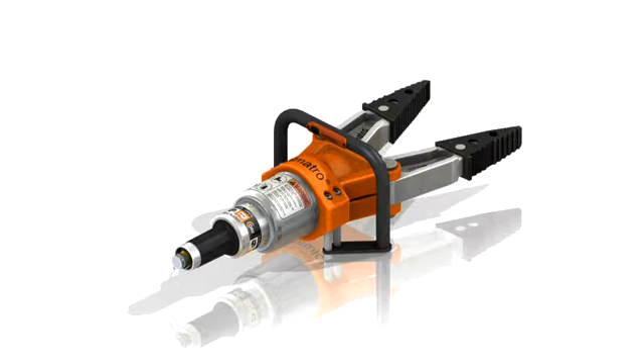This is your first look at SolidWorks simulation. With rescue equipment like this, performance is everything. The product must work reliably every time.

SolidWorks contains a powerful set of tools we can use to test out the performance of a design in many different ways. Two key areas that concern most designers are function and strength. Let's look at how SolidWorks Motion and SolidWorks Simulation tools can help us evaluate these goals.

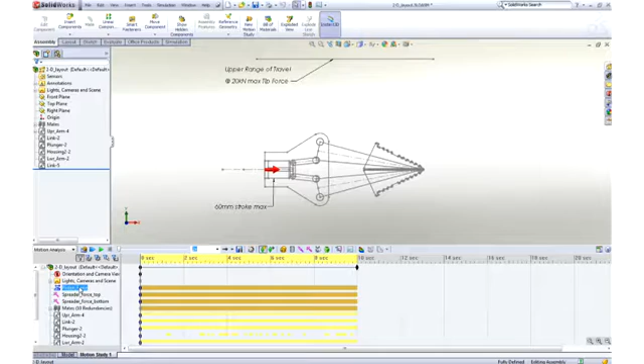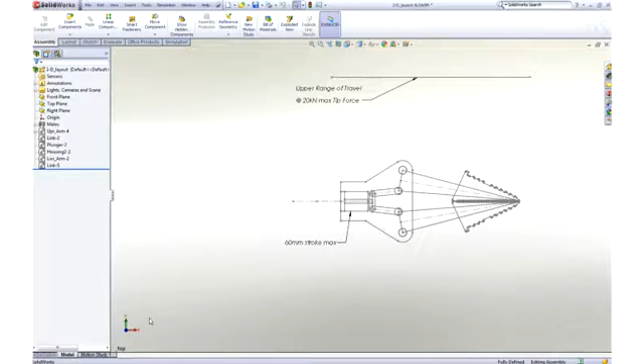We've seen how we can assemble our design in SolidWorks, but how do we know it's going to function correctly? It's invaluable to be able to validate the spreader operation without the need to cut metal or build prototypes, like in the case of this sketch layout concept. With SolidWorks Motion, we can easily test our design during the early stages of development to aid in sizing parts, bearings, motors, and actuators to ensure they meet our design goals. As we go through and refine our design, we can continue to use motion to validate the function.

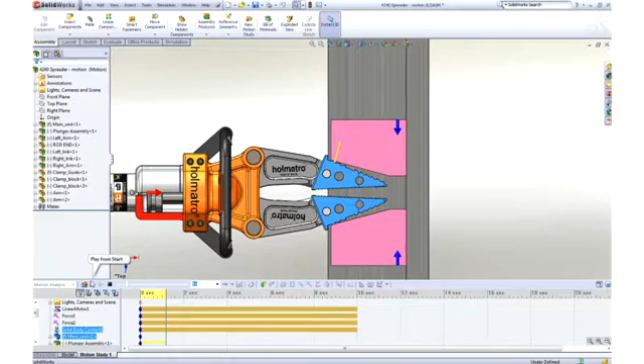Here we have a test fixture to determine the piston force required at different jaw openings to meet a minimum spreader force requirement. In SolidWorks Motion, we need only apply an actuator to drive the piston through its range of movement, the desired spreader force on both blocks, and finally specify that the tips of the jaws and the blocks will contact. An accurate physics engine then calculates the resulting motion, forces, velocities, and accelerations.

We can look at a wealth of engineering data such as the bearing loads on the pins, how quickly parts are traveling, and so on. With the built-in plotting tool, we can quickly show the required piston force with respect to the open position.

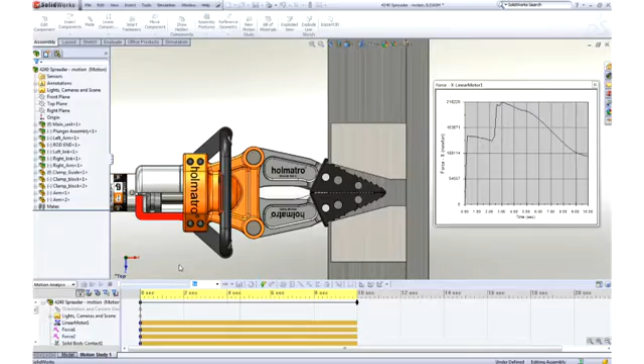We're even able to check the strength of selected parts in the mechanism over the entire range of motion. This can really help in determining if we need to use SolidWorks simulation for a more in-depth analysis to ensure that part strengths meet our goals.

Let's now focus in more detail on the structural aspects of our design with SolidWorks simulation. If we're concerned about parts failing, deflecting too much, or reducing weight, this is the tool for the job. Simulation can be used from the part level all the way up to the complete assembly to easily identify if the design will meet our needs.

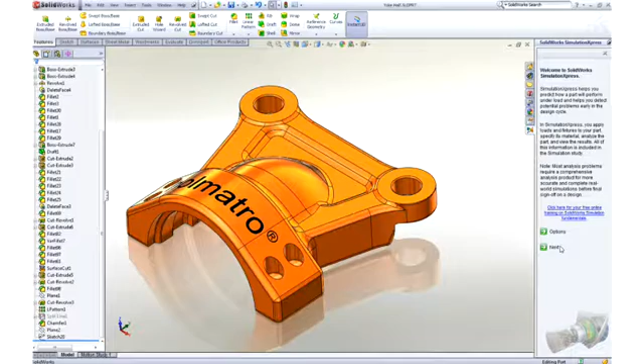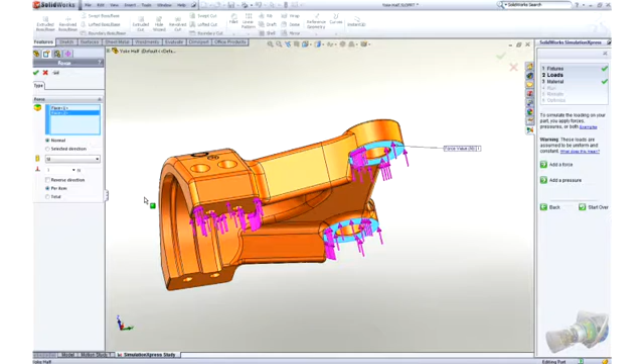You set up the model just like you would when doing an experiment in the lab. We start by using fixtures to hold a part in place. We make selections just by picking on geometry. It couldn't be simpler. We then apply loads to test if our part is going to fail or deflect too much. Visual feedback on the screen makes it very easy to understand how we've set up our test. The checklist on the right-hand side makes sure that you have everything ready to test out your design's performance.

After the simulation has run, you get immediate visual feedback on how the part is trying to deflect, which is great to confirm the test is set up correctly. It's easy to verify the factor of safety, stress, and deflection of the component.

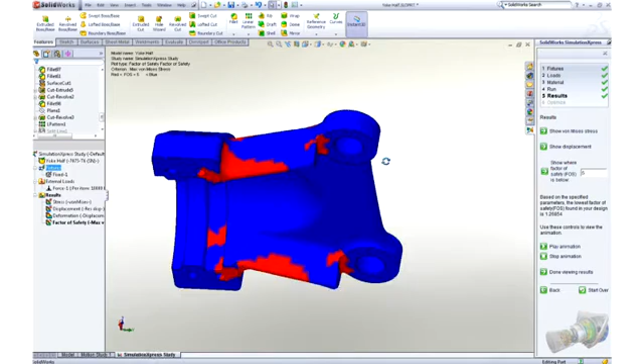Simulation also allows you to look at many design variations very quickly with design studies. In this case, we want to optimize the pocket size to reduce the weight of the arms, but still ensure we meet the rigors of ripping open cars. The slider interface makes it incredibly easy to compare designs and find the right one to save the most weight.

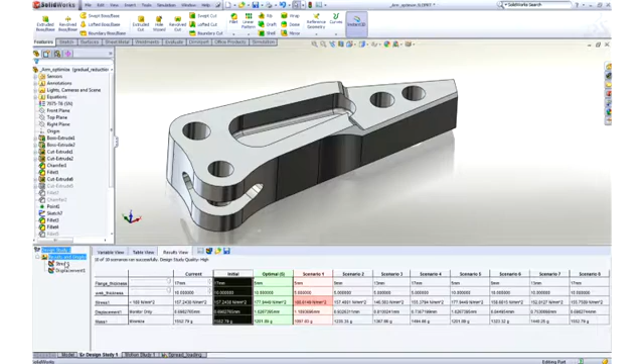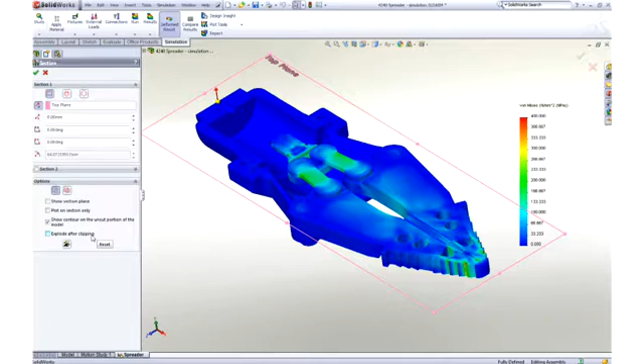SolidWorks simulation also enables us to look at the entire design and understand how load is transferred between parts, as well as where the critical areas of the design are located. In this instance, we're looking at the loads through the entire spreader. A force has been applied to the hydraulic piston and the tips of the arms are being held in place. We're even able to slice through the model to look at any internal sections. Results update dynamically for immediate feedback.

With SolidWorks simulation, you can even look at vibration, heat, material yield, durability, and many other types of tests.

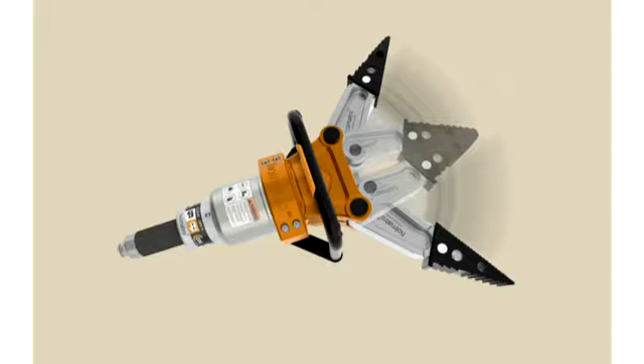With SolidWorks Motion and SolidWorks simulation, you can test your designs before you build them, cutting down on prototypes, helping to make sure it will work the first time, and reduce the time it takes to reach production.